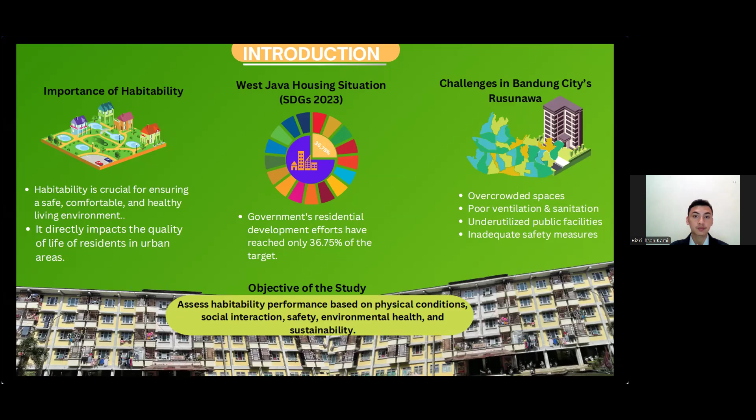In this study, our primary goal is to assess the habitability performance of Rusunawa in Bandung City. We are using established habitability theories and public housing typology to measure how well these areas provide adequate living conditions for residents. To achieve this, we're focusing on several key dimensions. First, the physical condition of the building and infrastructure, such as adequacy of living space, ventilation, and access to utilities like clean water and electricity.

Next, we examine social interaction by evaluating how well public spaces support community engagement and cultural activities. Another critical area is security and safety, where we assess the availability of fire protection systems and overall safety measures for residents. Additionally, we look at environmental health, which involves waste management, cleanliness, and the impact of living conditions on resident health. Finally, we assess sustainability by looking at how well Rusunawa manages water and energy consumption, as well as the integration of housing with the surrounding urban area.

The expected outcome of this study is to provide insight into areas that require improvement and make recommendations for enhancing the quality of life for residents in this housing area.

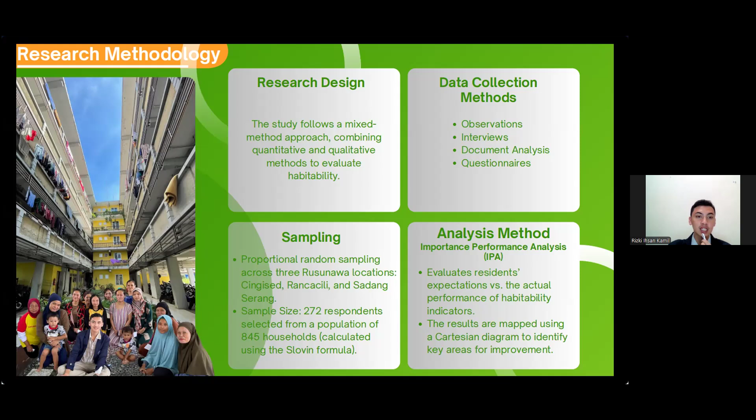Quadrant B, keep up the good work, high performance, these areas are doing well and should be maintained. Quadrant C, low priority, low importance and low performance, these areas don't require immediate attention. And quadrant D, possible overkill, low importance and high performance, effort here can be reduced. This analysis helps us identify where we need to focus our research to improve habitability.

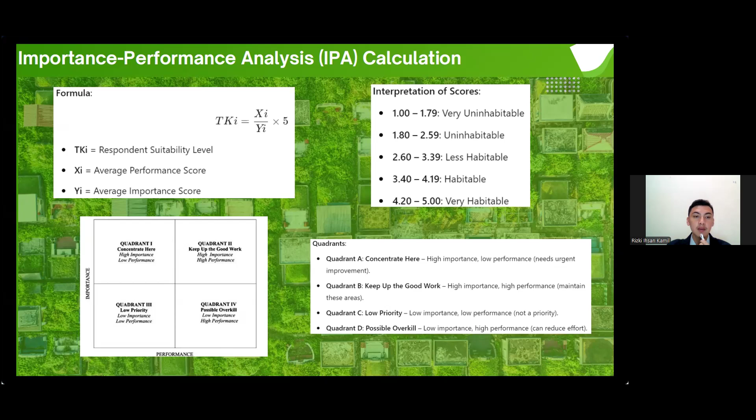Analysis of physical condition and infrastructure. In this slide, we present the result of the analysis for the physical condition of the building and infrastructure based on the indicators. 1. Condition of the building unit scored 3.93, indicating the structural integrity of the building is generally satisfactory and meets residents' needs.

2. Space adequacy received a score of 2.90, showing that overcrowding is a significant issue. The available space per resident is less than the recommended standard of 7.2 square meters, which causes discomfort for inhabitants. 3. Ventilation scored 2.78, reflecting poor air circulation within the buildings; this contributes to an unhealthy living environment and needs improvement.

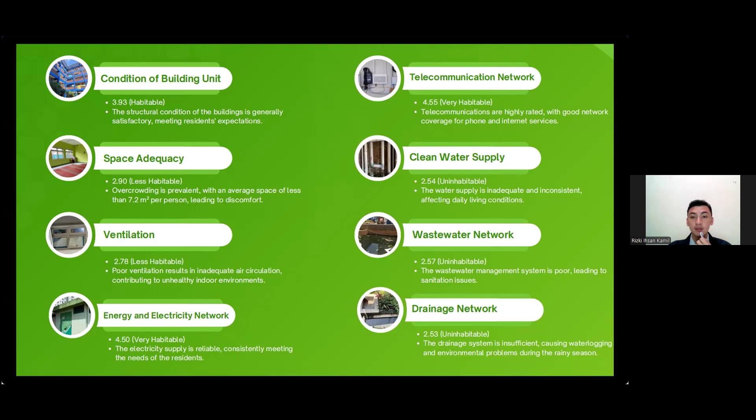In summary, limited public space, a lack of community activities, and underutilization of cultural facilities mean that social and cultural interaction within the Rusunawa is limited, and improvements are needed to enhance residents' community.

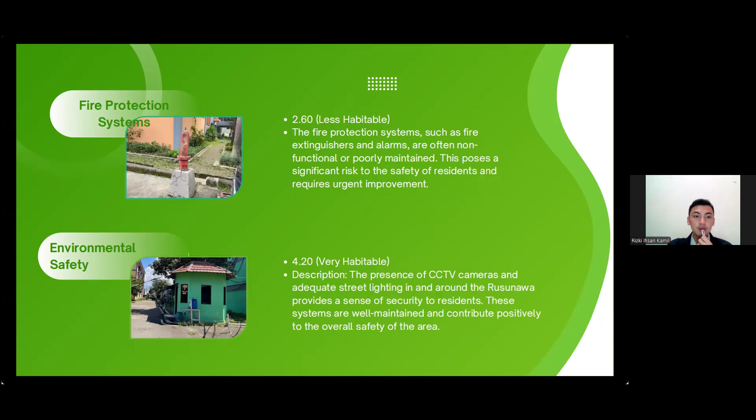The second indicator, environmental safety, includes the presence of CCTV cameras and adequate street lighting. This area scored 4.20, indicating that these systems are well maintained and contribute significantly to residents' sense of security. The presence of CCTV and lighting helps to deter crime and adds to the overall safety of the neighborhood. In summary, while environmental safety measures such as CCTV and lighting are performing well, there is a critical need to improve the fire protection system to ensure resident safety.

Next, analysis of environmental health. We will discuss analysis of the environmental health dimension focusing on two key indicators. The first indicator is waste management, which scores 2.55.

This falls into the uninhabitable category. The waste management system in Rusunawa is poorly implemented, with irregular waste collection and lack of recycling facilities. This has led to unsanitary conditions which negatively affect both the environment and health of residents. Improvements in waste management are essential to ensure better living conditions.

The second indicator, cleanliness of surroundings, scores 3.20, indicating conditions are less habitable. Efforts to maintain cleanliness of the overall public space and surroundings are insufficient, resulting in unhygienic areas throughout the Rusunawa. In summary, both waste management and cleanliness require significant improvements to ensure a healthy and hygienic environment for residents.

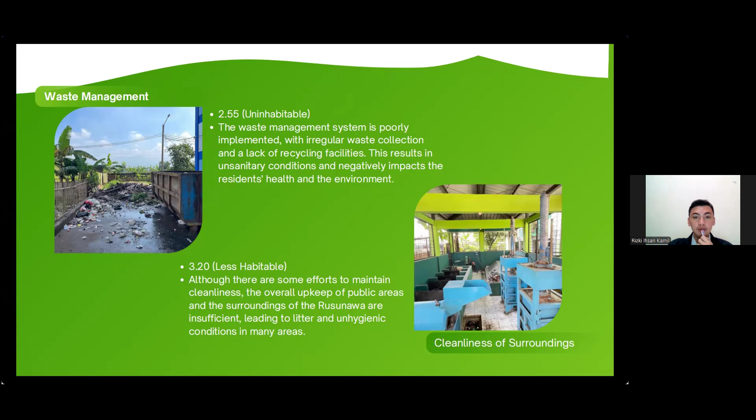Next, the area integration analysis, based on five indicators. One, accessibility to education facilities, indicating that the Rusunawa has good access to nearby schools and universities. This is particularly beneficial to families with children, ensuring easy access to education.

Two, accessibility to health services, showing that residents have adequate access to local clinics and hospitals. This ensures that healthcare needs can be met without significant difficulty. And three, public transportation connectivity,

The pedestrian infrastructure is poorly maintained and lacks adequate facilities for residents with disabilities, making mobility difficult in the surrounding area.

And five, proximity to commercial services, indicating that the Rusunawa has good integration with nearby shops and markets, providing residents easy access to daily necessities without major inconvenience.

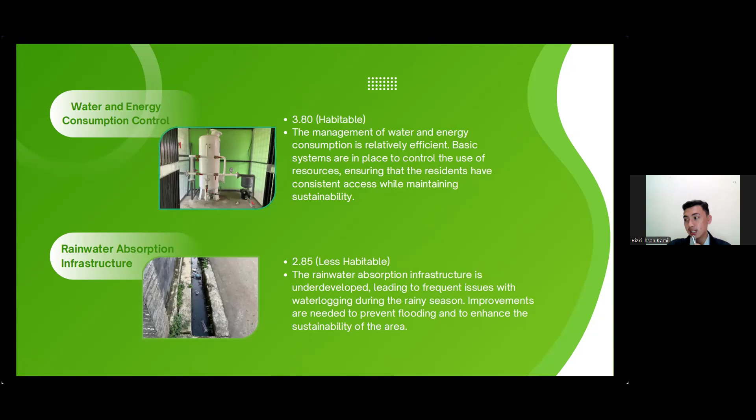And the result of the importance-performance analysis method, using the Cartesian diagram: if every dimension indicator has a value, the habitability is processed through SPSS to determine which indicators or dimensions need improvements.

There is quadrant A, or concentrate here, because this concept means low performance but high expectation. So these indicators in this concept need improvement.

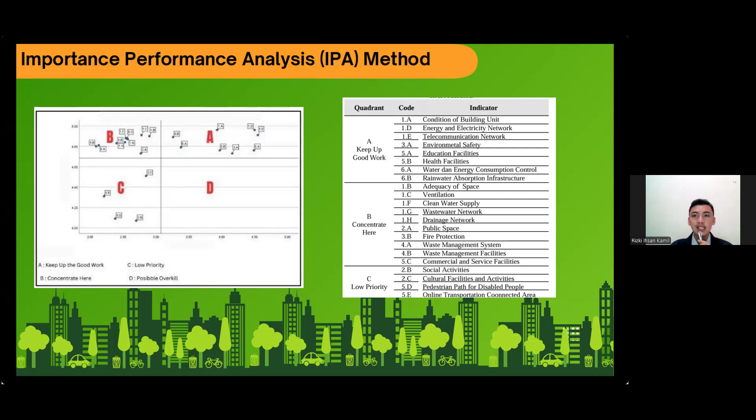The last conclusion of this project, the analysis about the habitability of Rusunawa in Bandung city, is that the residential area category is

less habitable due to unmet performance expectations in various dimensions. Physical conditions are indicated by limited space, poor ventilation, and issues with clean water and drainage. Social and cultural interaction are hindered by damaged facilities and limited activity space, while environmental safety and adequate fire protection

need improvement. Environmental health is compromised by irregular waste management. Area integration is sufficient for education and health access, but lacks in commercial services and transportation facilities. Sustainability in water and energy conservation is adequate, but rainwater management requires improvement.

It is recommended to improve asset management for Rusunawa in Bandung city through asset development, as the current residential area conditions are less suitable for habitation. Academically, further research should focus on planning needs and budgets for asset development in Rusunawa to ensure livability.